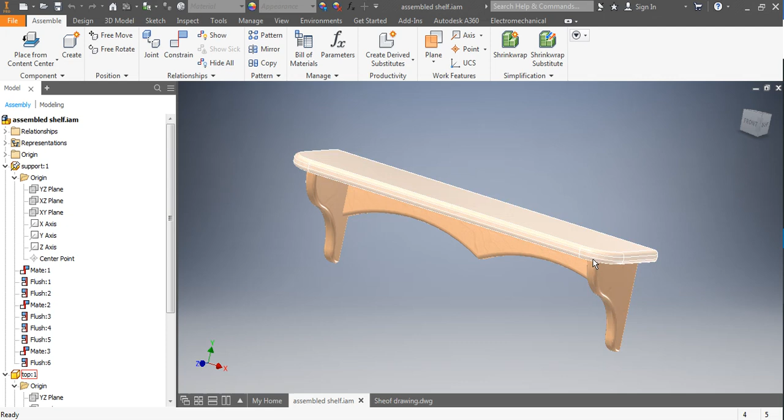Taking pieces from Inventor 2018 into VCarve to CNC route. In this tutorial, we're going to take these end pieces and bring them into VCarve so we can CNC route them out instead of having to go to the bandsaw, disc sander, and spindle sander to make them.

To start off with, I'm just going to double click the part to open it up. From there, over on the side, I'll take the actual part, scroll down a bit, and there it is. I'm going to expand it and go to the sketch, right mouse click, and go export sketch as.

From there, I'm going to go to my libraries to find this document - master documents, and I know I put this in Woodwork 9. There's a shelf folder, and now I'm going to save this DXF file. This one's just going to be called shelf end pieces - P-I-E-C-E-S, if I can spell it right.

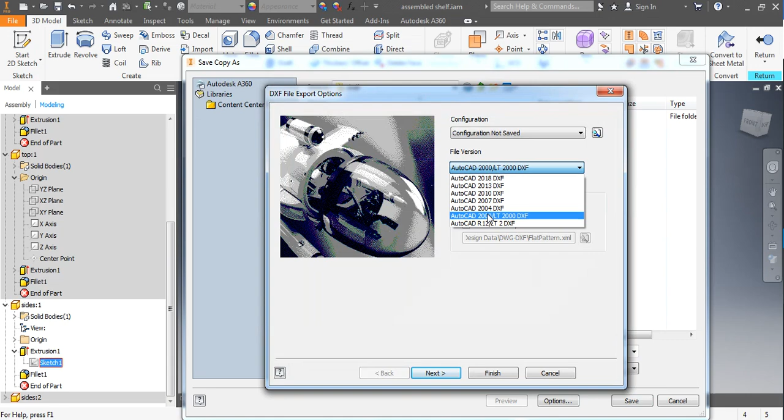For the DXF option, this is important, so I'm going to go to options. I always set it to AutoCAD 2000, not the latest version, because AutoCAD 2000 always works for different programs, especially older ones. Click finish, and click save. So there's that piece.

Now I'm going to open up my VCarve - it's already opened up and sitting here. I'm going to go to create new file. Actually, I'm not even going to create a new file - I'm going to go to file, and go open.

From open, I'm going to work my way back to my documents - my master school documents, Woodwork 9, there's Woodwork 9, and then my shelf folder. There's the shelf end pieces as a DXF file, and I'm going to click open. So when it comes in, there's my actual file.

Now there might be some extra pieces in here - for some reason it brought in these little things. So how big do I need this? Well, over on the side now I need to set up my paper, and I'm going to cut two of these out. Right now it's width of 5, so I'm going to go to 5.

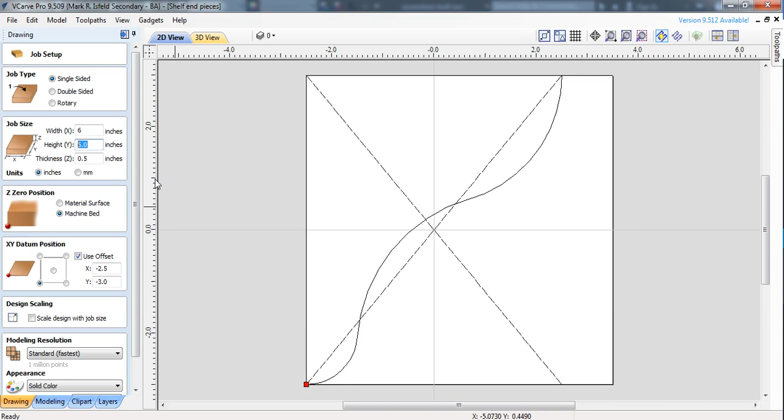I need some extra space for the CNC router, so I'm going to make sure it's 1 inch bigger - we're going to go to 6. For height, instead of doubling it to 12, we're going to use this area and make the pieces come out of here as well, so I'll make it maybe 10 for right now. How thick is my wood? I'll measure it with calipers, but we're basically going to be 3/4 of an inch. Machine bed, use offset - make sure this is turned off, whatever you do. And we're zeroed in the corner, and finally we click OK.

So now here's my file, or my part, brought in. Now I'm going to move it a bit - one thing is I'm going to get rid of all this other stuff that probably shouldn't have come in, but it did.

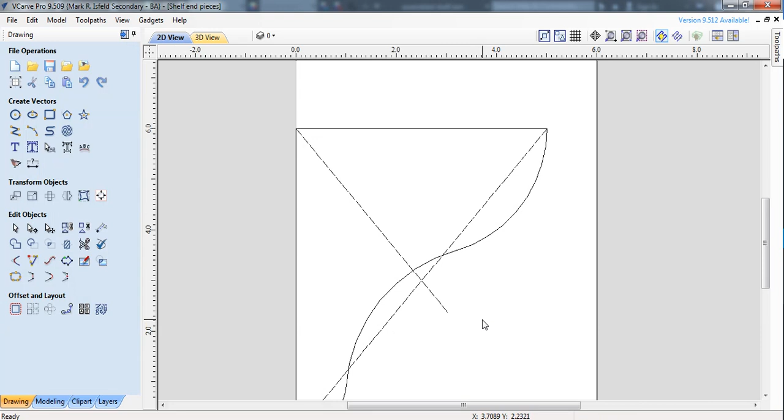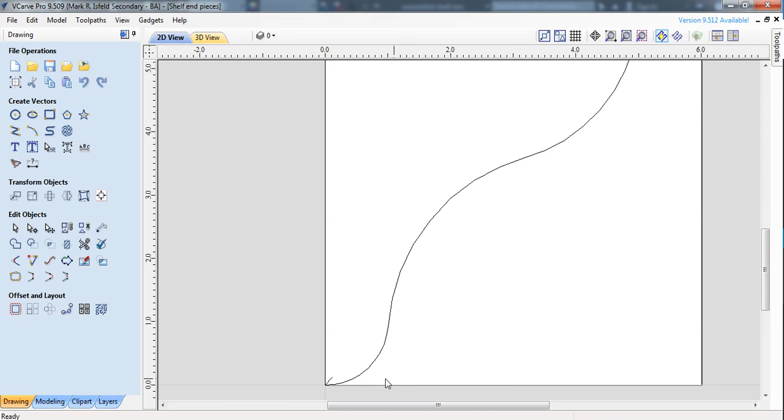So I'm right mouse clicking - if you right mouse click like this, it highlights whatever it touches. If you go this way, you'll see it highlights whatever the box is around. So if I go like this... okay, there we go. We go like this, and finally I'll go like that. There's one more in the corner there. That one doesn't want to go right there... there we go, okay.

So next, highlight this, and I'm just going to go to move over on the side here. I'm going to move this one to the top, and move it in a bit. I'm going to leave it about 1/4 inch down.

Now, how do I know that's a 1/4 inch? Here's what you do: you zoom in close, grab up top here, and you can grab the snaps - so that's now set to 10. This is kind of like, you can use these for actually distancing stuff off. So I'm going to go 1/4 inch from there - 10 less 1/4 is 9.75. So as long as I'm below that line, I'm fine.

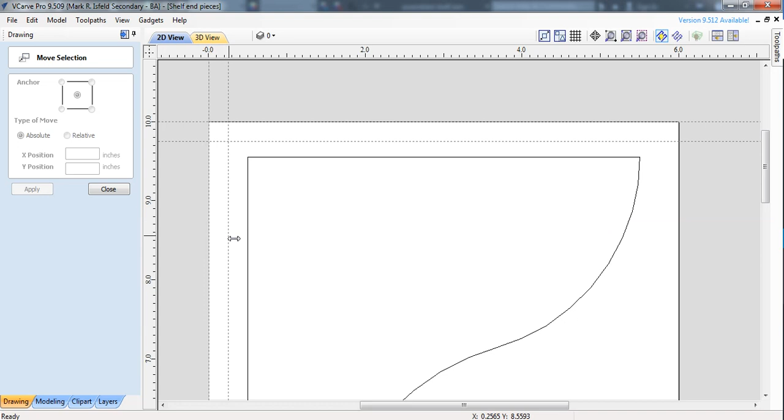And if I go from the side here, that's 0, and grab another one - so again 0.25. We'll put another line over on the far side, and then work backwards from that - so that's 6, so I'm going to go 5.75. As long as I'm not touching those lines, the router bit will not hit my fence. So there's the first one put in, and I'm going to close this off.

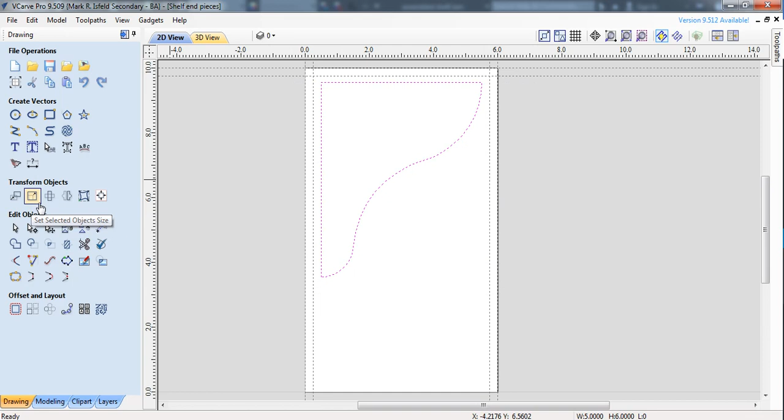I'm going to highlight this now, highlight the whole thing, and from there I'm going to copy. Actually, I'm going to rotate - no, we'll copy it first. So I'm just going to go Control C and then Control V on my keyboard, makes another copy - there it is.

And I'm going to rotate it - how much? 90 degrees, 180 degrees. Rotate it 180 and go apply. Close it off, and I'm going to go back to move.

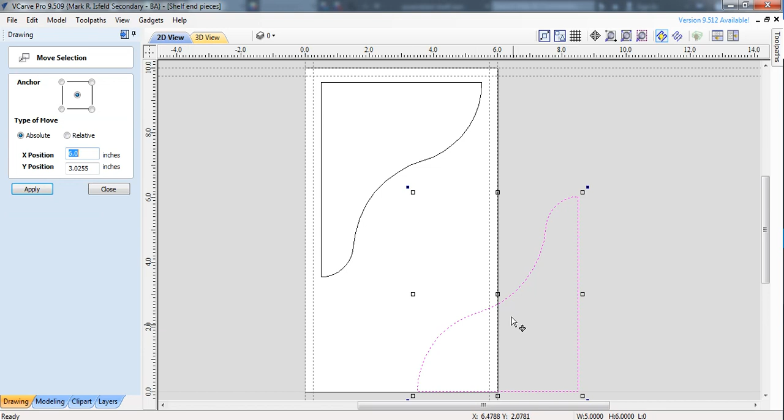I'm going to move this part back into here, and you can see now that I don't need as much material, right? So I can actually get this quite close, probably up to about there, and I definitely have enough space there. Click close. I'm going to go back into my job dimensions and make that a 9-inch piece instead - oops, you can see which way it went. We're going to hit OK.

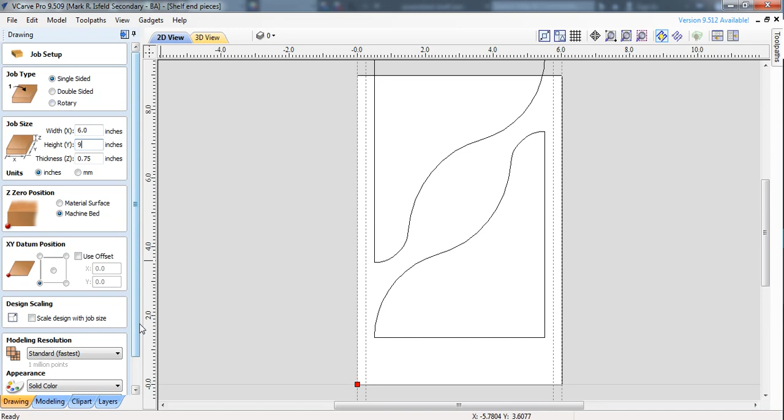What I'm going to do is just move all this stuff - I'll take all this and move it down. Go move... and now it's basically in there, and you can tell that that's going to fit. So I'm going to stop here as part one.

I'm going to close this off for the tutorial, and the second set is to actually set up the lines for cutting this out. So that completes part one of a tutorial on going from Inventor to VCarve and finally out to the CNC router.